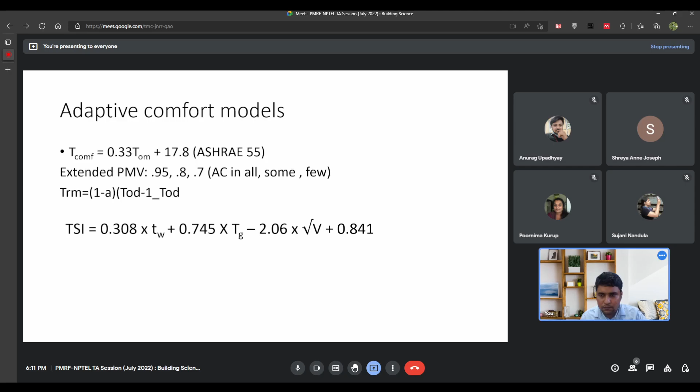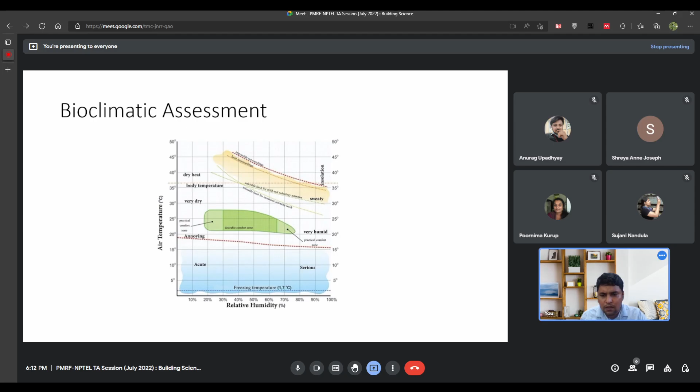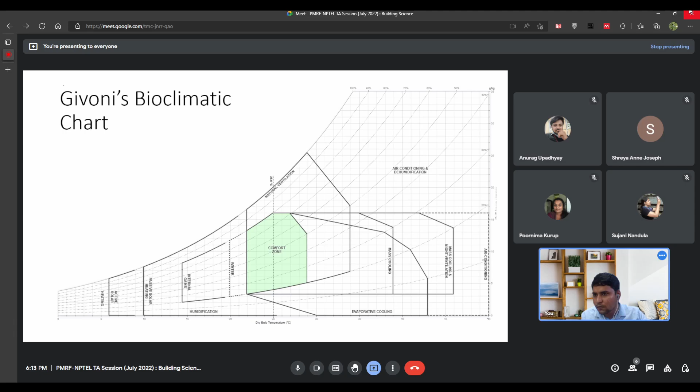Moving on, we look into Givoni's bioclimatic chart. This chart you can actually access online. I'll stop sharing and reshare the screen, opening another site called Andrew Marsh.

I hope you can see. Okay, sorry. I'll just reshare the screen.

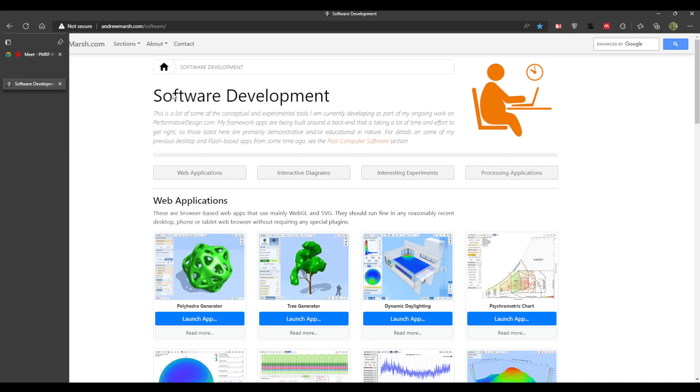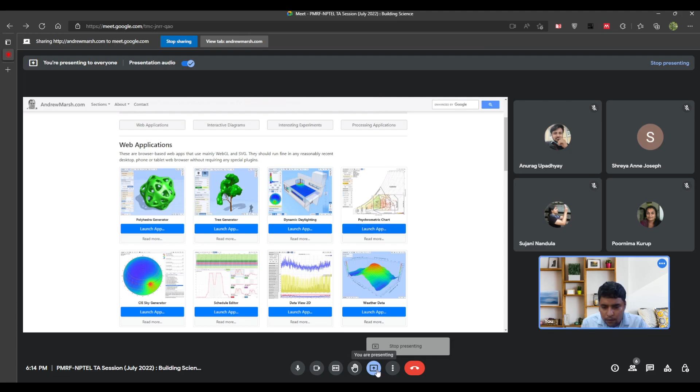So this is the website I was speaking about. This website has various tools which you can go through. One of which is the psychrometric chart. In terms of shading analysis, there are multiple tools also. And last week I was speaking about the tool on 2D sun path and 3D sun path. You can explore this. These are all free tools, which is very useful. When the course was prepared, this was not functional, but this one is a very useful tool. I hope you all look into it.

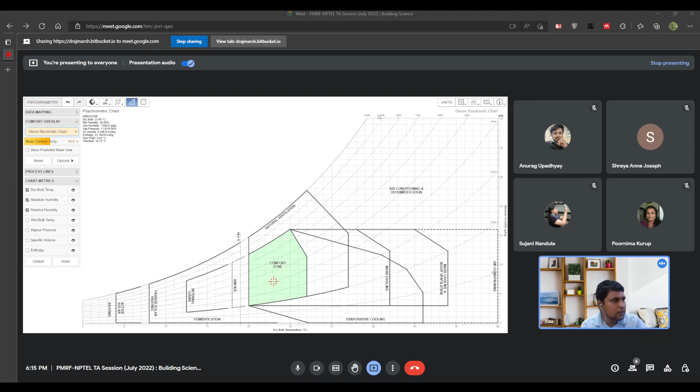Okay, speaking of this bioclimatic chart. So when we have temperatures beyond the thermal comfort zones, there are various strategies you try to incorporate. Let me just insert a weather file. Let's take Ahmedabad as an example. So I have plotted all the hourly data, and you can see the spread. It is spread throughout. There are so many areas which fall away from the comfort zone.

Most of the hours it is satisfied just by natural ventilation, and there are some portions where you need to provide air conditioning and dehumidifying to be comfortable. And in the winter seasons, there is not much active heating required; just by utilizing internal heat gain inside the envelope, you will be able to achieve comfort. That's what this whole chart shows.

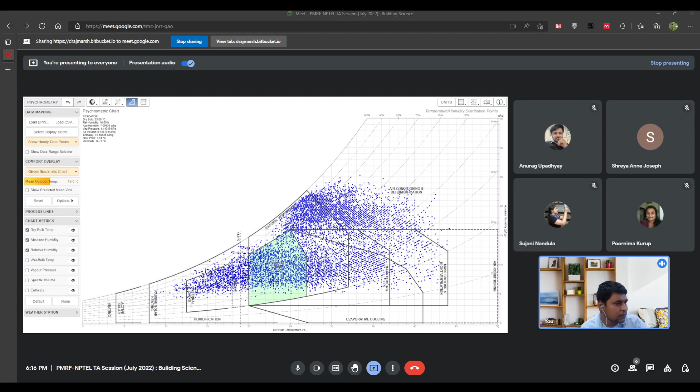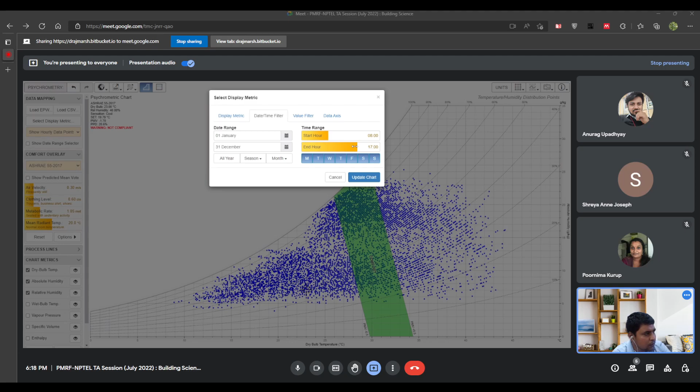These tools you can explore. If you go to select display metric, you can also put filters. For example, if it's an office building, you can filter the time the building will actually be utilized, reduce the number of points, and then look into strategies which actually matter during the hours the building is operated. All this thermal comfort stuff matters because it deals with humans. When there is an occupant utilizing the space, you can narrow down to that time frame and design accordingly.

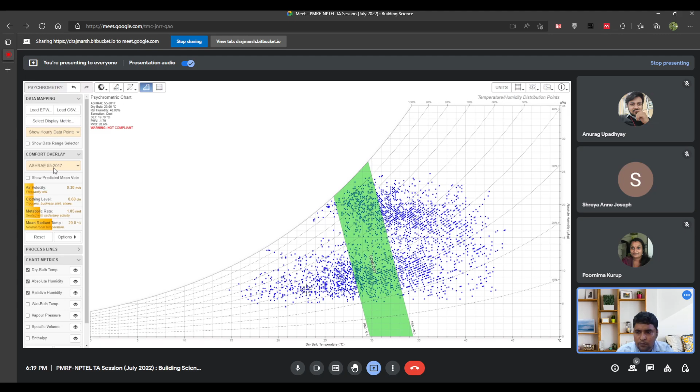There are also multiple spaces within a building. Some spaces won't be utilized during a portion of time. So this strategy can be used at a space level instead of a building level also. Try to explore this tool further. I'll go back to the presentation.

You can think of it the other way also. Imagine you are at this point and you want to go into the thermal comfort zone. So you have to utilize dehumidification and cooling.

Same way, if you want to heat a space, you are at this point and you want to achieve the thermal comfort zone, you have to utilize dehumidification and also, sorry, let me correct it. In this place it is actually dry and also cold, so you have to utilize heating and also humidification. So there should be a proper understanding of the psychrometric process so that you can devise strategies accordingly.

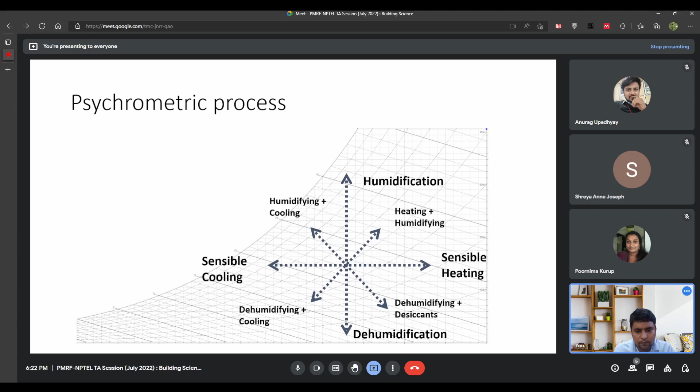Further moving on, let's look into the envelope-related factors and heat transfer factors that are related to thermal performance of the building. The heat transfer depends upon the temperature difference between the surfaces and the surface area of the actual element or assembly that you are considering, and the surface characteristics, in terms of conductance and multiple other characteristics. I'll talk about it later.

And there are two things in terms of conductance. The conductance is the heat flow property of a material with a stated thickness. And if you think about conductivity, it is the same heat flow property, but of unit thickness. This you have to take into consideration when you go for calculations.

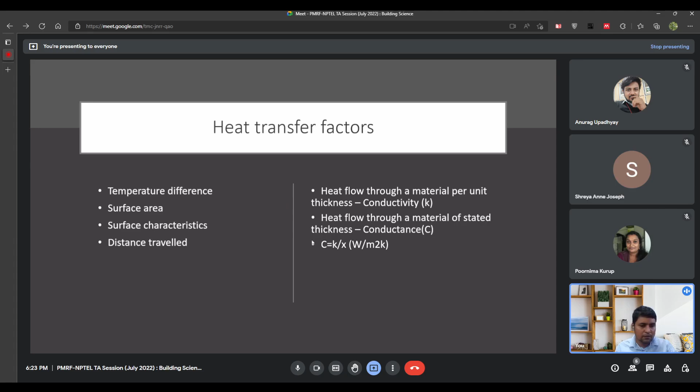And further moving on, conductance and conductivity are actually properties of a single element. So if you go for a multi-layer wall assembly, you have to take into consideration all the conductance properties of the elements and also the heat transfer coefficient of the air layer inside and also outside. So thermal transmittance speaks about a component, not just a single element, the whole component.

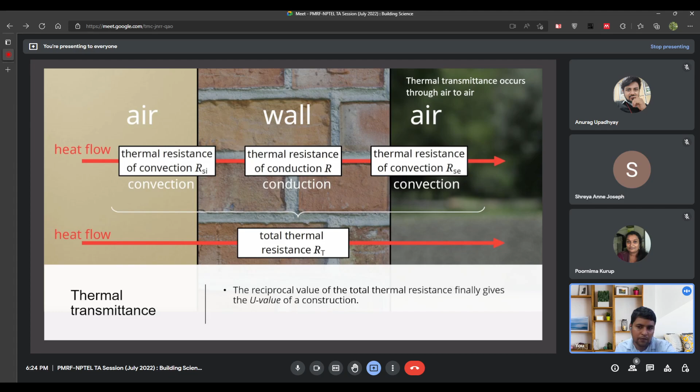In order to calculate it, we can look into a small example. Imagine you have a multi-layered wall, and it has a 120 brick masonry wall, then a 50 air cavity, and 100 concrete, and then another 25 of glass wool, and a final outside layer of 12 cement plaster. And both sides of the wall will have the heat transfer coefficient of convection. Here in this example, resistance has been given. Basically, resistance is the reciprocal of the transmittance value.

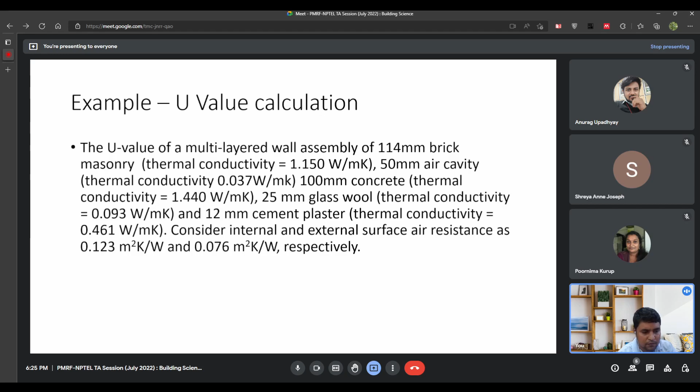So, how to find it? Here, the wall thickness has been given, and thermal conductivity is also given. So, in order to find the conductance, you use the conductivity and also the thickness. In this case, in order to find thermal transmittance, we are trying to deduce resistance. The first layer is actually 120 mm. In the question, it is indicated as 114. So you divide the actual 120 mm by the conductivity. You will get the resistance of that particular layer.

So for all layers, you divide the actual thickness by the conductivity. You will get the thermal resistance. Finally, you add all the resistance values, and you will get a total resistance value. And in order to get the thermal transmittance, you take the reciprocal, and finally you will get the thermal transmittance value.

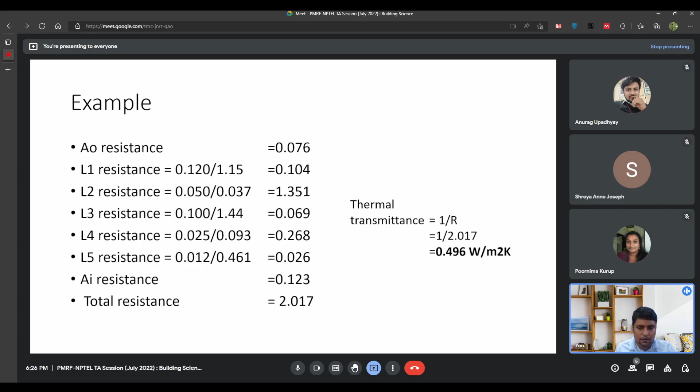Further, this thermal transmittance property is actually a property of conductance, and there are other ways heat can transfer, the other two being convection and radiation. Convection is heat transfer based on fluid or air movement, and it can be free convection, which is based on the temperature difference of the fluid. Like if at floor level the temperature is 30, and at roof level the air temperature is around 33, due to the temperature difference there is a movement of air. This movement is also used in the stack ventilation strategy. You can look further into the literature. The other convection is forced convection.

Next, the radiation part. Radiation is basically heat transfer by electromagnetic waves, and this heat transfer is based on the actual temperature of whatever object it is. Here I have shown a tungsten bulb where the tungsten filament is actually radiating heat energy. More than the light it produces, the heat that it produces is high.

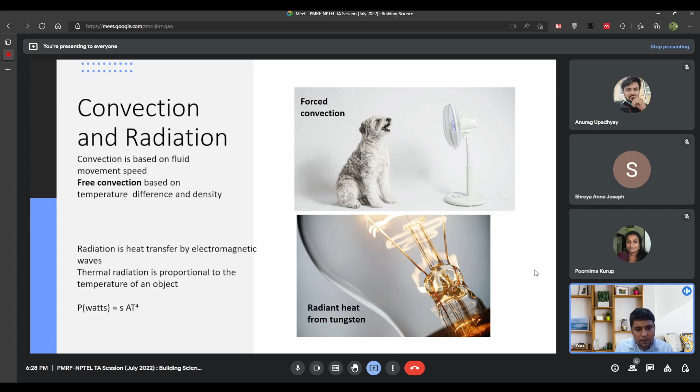When we speak about radiation, two properties we have to look into: absorptivity and emissivity. Absorptivity is a response to the short wave radiation falling on the surface. Emissivity is basically once a material absorbs the radiation, it starts emitting it back, mostly in the long wave radiation spectrum. So this is a property related to the material only.

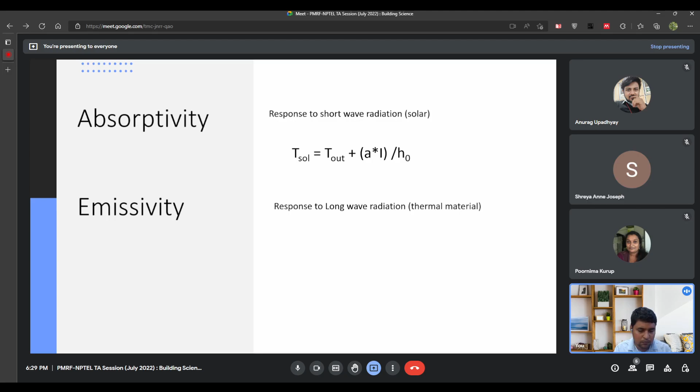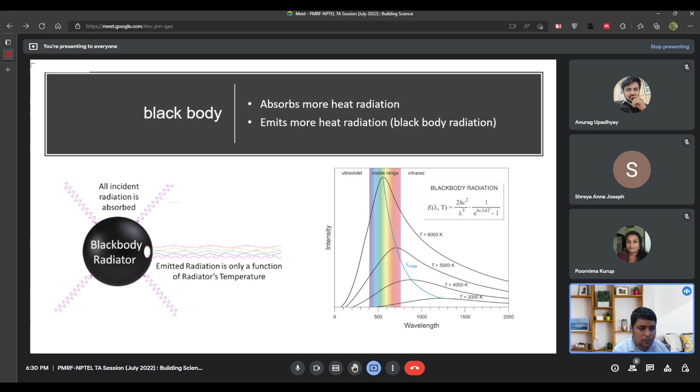When we talk about a perfect black body, it's a very good absorbent of heat, and also a very good emitter of heat. You would have come across this in the week 0 assignment question.

Moving on, when we talk about insulation, there are multiple types. One is resistive, which is a property of conductivity. The next is reflectivity, which is a radiative property where solar radiation falling on a surface gets directly reflected. Another is capacitive insulation, which depends on solar heat storage. Once heat is transferred inside a material or assembly, it has a capacity to store heat for a while, given by the capacitance.

These properties we further look into at different levels of the assemblies. When we talk about thermal efficiency, there are 3 different levels. One is the elemental level, which I spoke about earlier, and the property associated with it is thermal conductivity.

Another is the component level, where we have multiple layers of elements. Here we speak in terms of thermal transmittance and thermal heat capacity. Further, when you go to a larger assembly level and building level, there are other indices which come into play, so that we can utilize them and see whether the indicator is a good indicator to achieve good thermal performance inside the building.

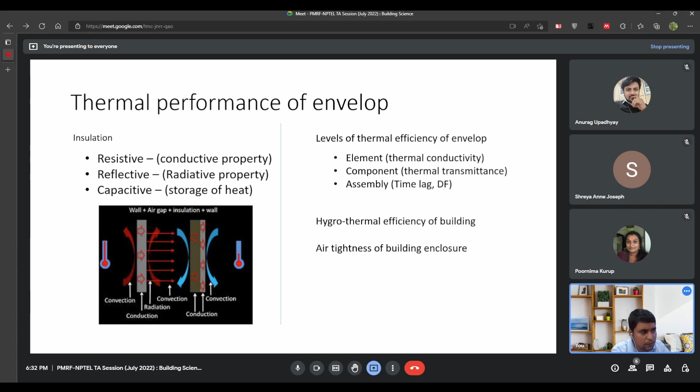Before, I was speaking about heat capacity. Heat capacity is a property based on the density of a material, specific heat capacity, and thickness. There is a simple formula created to find the heat capacity required for a particular location.

Imagine you have a location with a maximum outdoor average temperature - take it as the monthly average maximum temperature - of 39 degrees Celsius, and minimum average temperature of 28 degrees Celsius. You also need to know the absorptivity value, which we saw earlier - the amount of radiation absorbed by a surface. The other is I max, the maximum amount of radiation incident on a surface.

You can find the maximum and minimum average temperature - 39 and 28 - from weather data. And absorptivity is based on the surface; for example, for an outer wall surface, you find the absorptivity based on the surface treatment, like whether it's painted white - it depends only on the surface level treatment. Then you can deduce the required heat capacity of the whole wall. In this case, the required heat capacity is around 65.75.

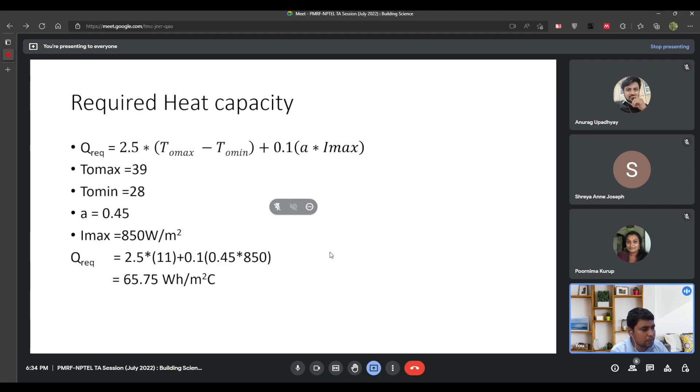Further, there are multiple performance indices, like U value, which we spoke about earlier - this is at the component level. Thermal damping is more of a building level or assembly level indicator.

Thermal damping is based on the difference between the maximum outdoor temperature and minimum outdoor temperature, minus the difference between maximum indoor temperature and minimum indoor temperature, divided by the difference in maximum outdoor temperature minus minimum outdoor temperature. This gives an indicator value, and it should be a minimum of 60. This is set by the National Building Code.

There is another indicator called decrement factor, which helps find this - it's also an indicator like time lag, which you would have come across in previous sessions. Time lag is basically the total shift in peak temperature - the difference in time between the peak outdoor temperature and peak indoor temperature. Both time lag and decrement factor are indicators of the thermal heat capacity.

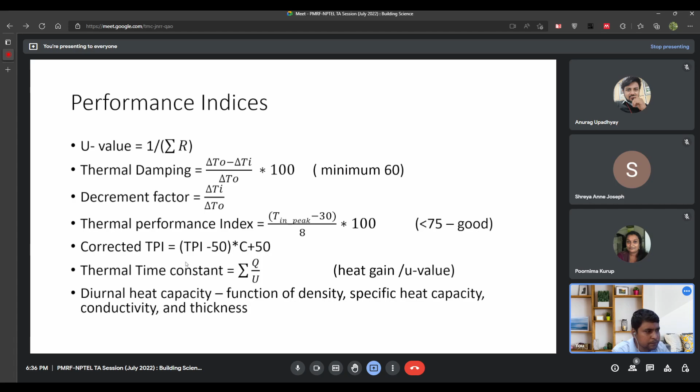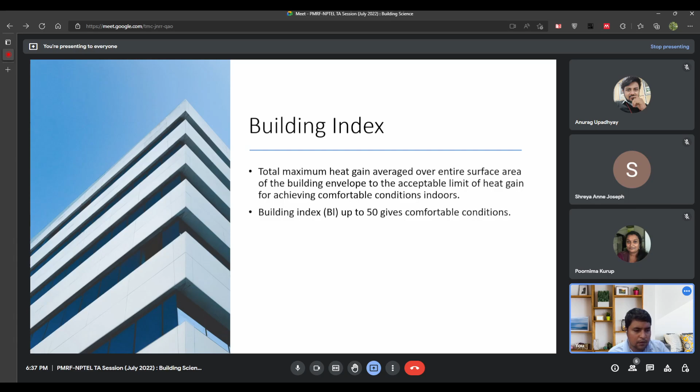There is another index called building index, which is the total maximum heat gain averaged over the entire surface area of the building envelope compared to the acceptable limit of heat gain for achieving comfortable conditions. If the building index value is less than 50, the space is considered comfortable. This is as per SP41.

Further moving on, all these properties we were speaking about are for opaque materials, basically wall and roof.

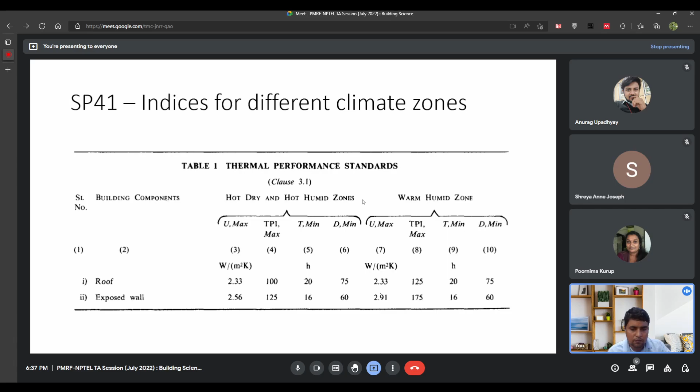Next, we have to look into the properties we have to consider for glazing. The glazing's thermal performance basically depends on the thermal transmittance value of the glass separately and also the frame material. So we have to think in terms of the U value for both the glass and the frame.

The next one we have to consider is the solar heat gain coefficient. Before solar heat gain coefficient came into place, only U value was actually used, but solar heat gain coefficient is a very good indicator of the thermal performance of the glazing system.

Another final factor that affects the thermal efficiency is the airtightness of the whole assembly.

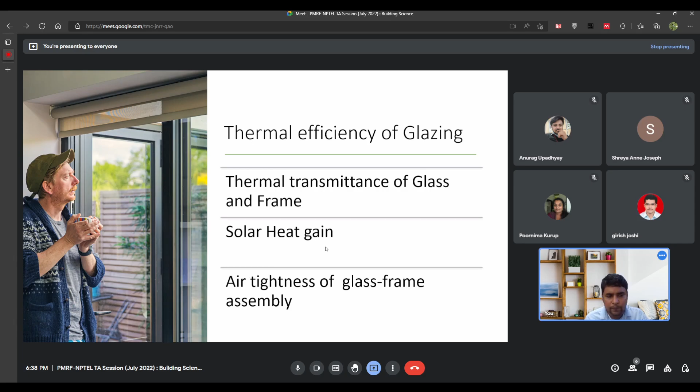Looking at the solar heat gain coefficient, it's basically the total heat gain that is admitted inside through the glass divided by the incident solar radiation - it's just a fraction. If you have a very low fraction value, it means you will have very good thermal performance of the glazing system, and it's totally different from the visible spectrum.

Like the lighting efficiency of the glazing system is calculated based on the visible light transmittance, and it is totally different from solar heat gain coefficient.

So it is totally possible to have a very good thermally performing glazing system with also a good VLT value, and this improvement can be made using low E coating.

Also, if we try to reduce the solar radiation falling on the glazing, that will also improve the solar heat gain coefficient. Basically, if we provide proper shading with a good performing glazing system, it will improve the solar heat gain coefficient.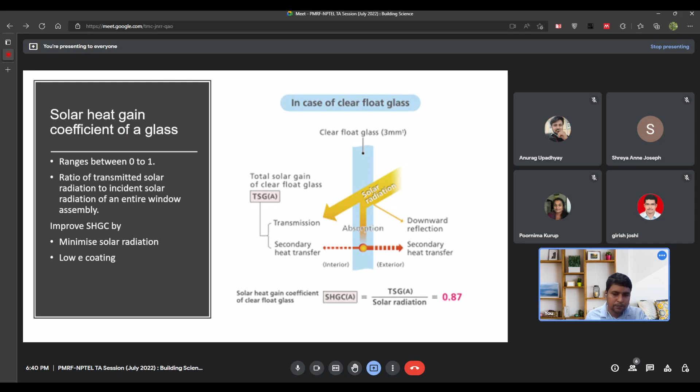Moving further, the final week's final session would have covered shading angle and shadow angle and also shading devices. There are two shadow angles, horizontal shadow angle and vertical shadow angle. Horizontal shadow angle is used to determine the projection of the vertical shading device, and vice versa.

Vertical shadow angle is used to devise the horizontal shading device, and these can be calculated based on the solar altitude and azimuth angles. We will discuss this further in the next session because it's kind of a continuum.

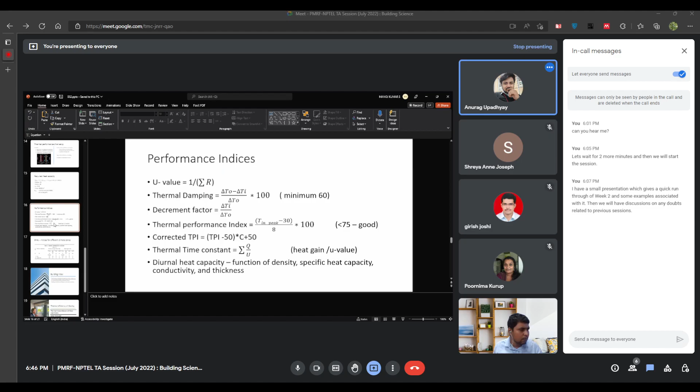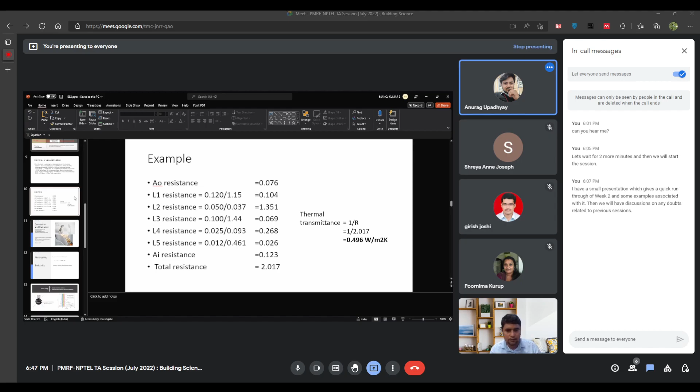In the slides you discussed a question on U-value, where in the solution you said to divide the thickness by thermal conductivity. So here you are dividing thickness by thermal conductivity. Isn't conductance equal to conductivity divided by thickness?

But what we are trying to find out is the resistance, which I have written here. You cannot directly find the thermal transmittance just by adding values. You have to first find the summation of all the resistance values, then take the reciprocal of the resistance. That's why in this case we are finding the resistance value. Okay, got it.

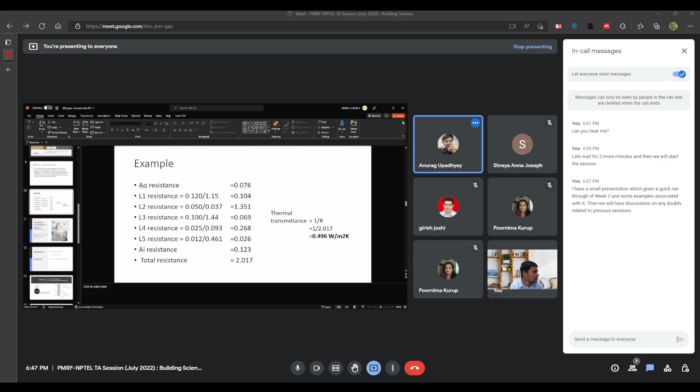Yes Poornima. Sir, I am a research scholar working in the thermal comfort zone. I wanted to ask about sol-air temperature - is sol-air temperature directly measurable with some equipment?

No, it's not directly measurable by equipment because there are two different things we have to consider. One is the absorptance value of the surface you are measuring, which you cannot measure directly - you should know the absorptance value, maybe reduce it further rather than using a single measurement. The other one is the radiation, which is dynamic and you can actually measure it.

So radiation, if I measure it right next to the wall - because I cannot really measure radiation if I'm keeping equipment on the wall - if I place something that measures radiation right next to the wall, can I use it, speaking from a research point of view? Yes, yes, you can use it.

Okay, and can I use a heat flux meter, something that measures heat flux through it? Yes, you can also utilize it. So with these things I can do this and calculate it manually - is there any software I can use?

These blue lines actually depict the monthly ranges of the thermal condition, the maximum and the minimum ranges. So this indicates whether the diurnal range is wide or not. If there's a high diurnal range, you can utilize a strategy like high thermal mass. That will be a good indicator when you choose this show months range.

And this daily outline, this is for a single day; you can see what is the diurnal range and the whole pattern. You can switch on this show date indicator and move to a particular day or month. For a whole month it will average out and show the shift in the thermal condition from the night till next day.

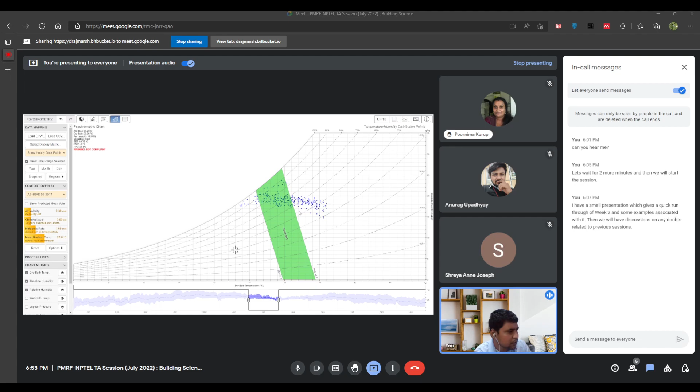Another thing, data points you can select per month. For example, in July, some parts fall inside the thermal comfort zone, and some parts can be satisfied with natural ventilation. This chart is based on the weather data; based on the actual final design, you will have different indoor conditions. So the final output to look into is the indoor conditions; you can plot those data points and see whether they are comfortable.

So basically this whole chart is based on the outside weather data, and you can utilize it to choose the strategies you want and implement them. In the coming weeks, like week 3, you will be exposed to thermal energy simulation of buildings, which will yield the indoor temperature conditions. You can place those in the psychrometric chart and see where these data points are.

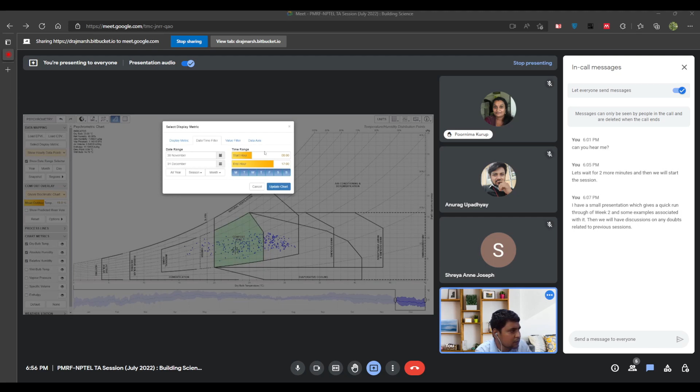Here, the only option to improve energy efficiency is properly sizing and choosing an efficient system. That is the final way. Looking at winter conditions in Ahmedabad, I have chosen 9 to 5 p.m. only, office hours. During office hours in winter in Ahmedabad, almost all the conditions fall around the thermal comfort zone.

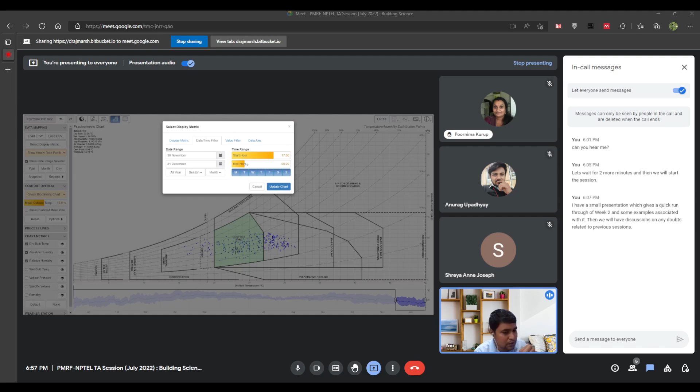But now let me just change the whole setting. Imagine we are looking into a house where a person is working, and then he comes back in the evening and then starts in the early morning. The condition actually totally changes. Here the condition is colder, in the winter time, where you need some kind of internal heat gain.

Basically, if you have the high capacity wall, the heat, which is basically the solar radiation in the morning time and the afternoon time, is stored in the wall envelope, and further it will be re-radiated inside also. If you have a wall, it re-radiates in both directions, so you cannot say that the heat will be dissipated easily. It dissipates very slowly.

And if you look at the right side, you can see that the cooling strategy basically involves two parts when you have a high capacity wall. One thing is you should have a high capacity wall, and also you should have night ventilation where you try to flush the whole building. That is one main thing you have to consider. So let me go and plot the whole year.

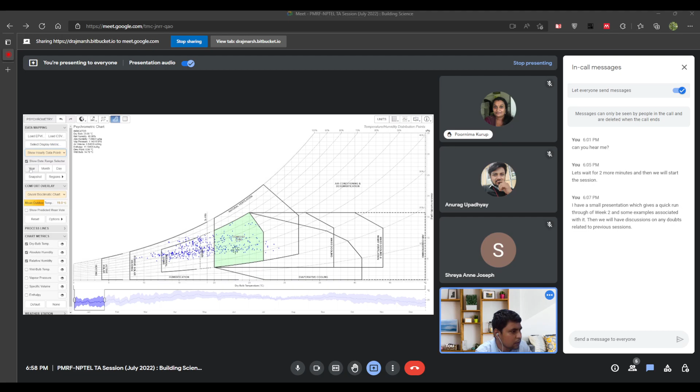Sir, what is this 19 degrees Celsius line? 19 degrees. Basically, this given is a bioclimatic chart, right? It is based on the mean outdoor temperature. So if there is a change in the temperature, the whole strategy shifts.

When you go to this PMV based overlay, here the neutral zone, which lies between minus 0.5 to plus 0.5 of the PMV, predicted mean vote, even this one shifts when you change the clothing or the metabolic rate or the mean radiant temperature. Because the PMV is based on 6 different factors, as you remember. So changing each value actually affects the predicted mean vote.

So if the predicted mean vote is 0, it means it's a thermally neutral condition, and this thermal neutrality is based on an experimental setup, and it's different from an actual field study. So with PMV, you can't say directly that if the PMV is 0, a person will be comfortable. Maybe the person will be feeling a bit cold also.

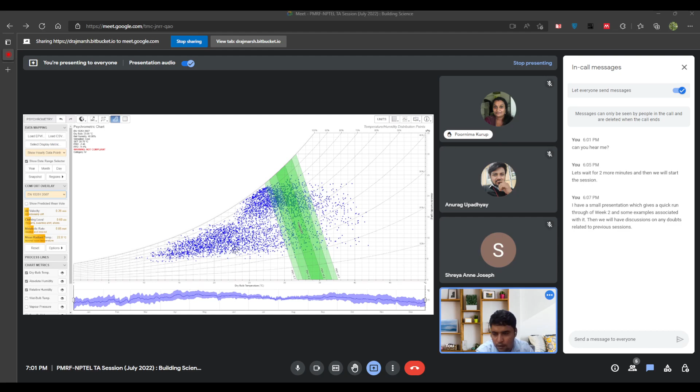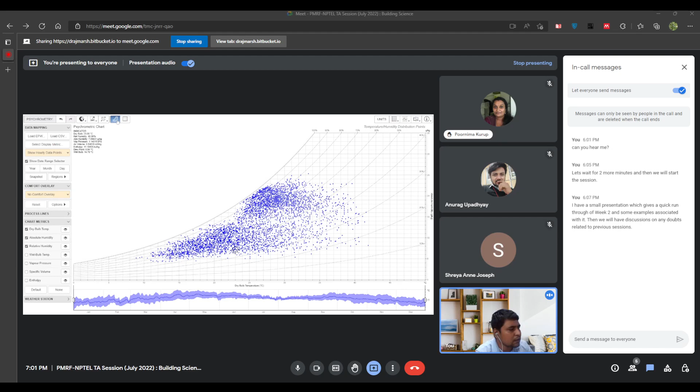So all these charts and indices are based on a data set, and they have been determined based on it, and it might not be a perfect match, but it is a good indicator that you have to remember. Other than this psychrometric chart, there is another chart called the relative humidity chart, which plots dry bulb temperature on the x-axis and relative humidity on the y-axis.

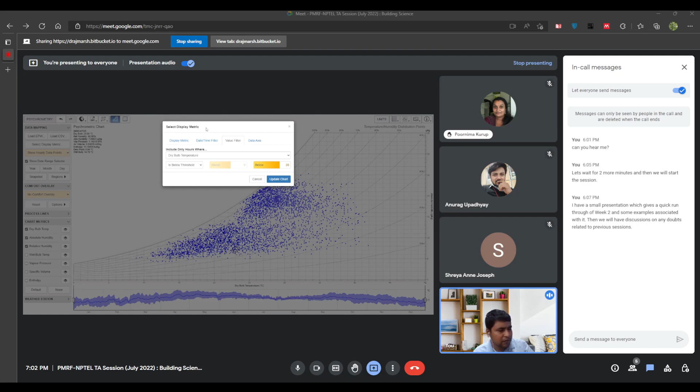What else can I show you? Here you can also apply filters. For example, you want to see how many data points are falling where the dry bulb temperature is below a certain threshold. For example, you set a condition that whatever dry bulb temperature is below 28 degrees Celsius will be a comfortable condition. So these many hours will fall below the 28 degree range.

These kinds of filters you can apply and utilize, and there is also an option to export this chart for further presentation. I think that's it from my side.

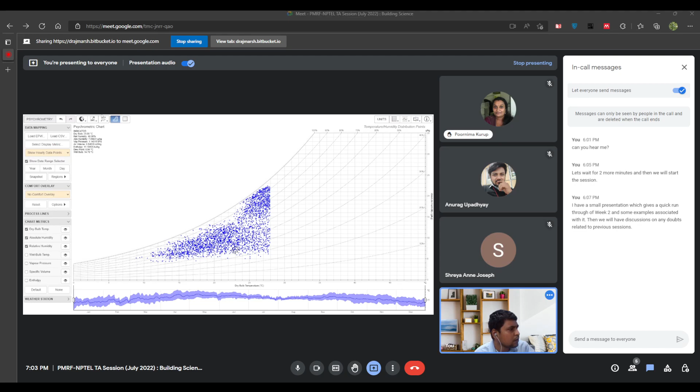Next week I'll cover week 3's portion, which is related to, let me check, thermal simulation and also lighting. We'll look into it further.